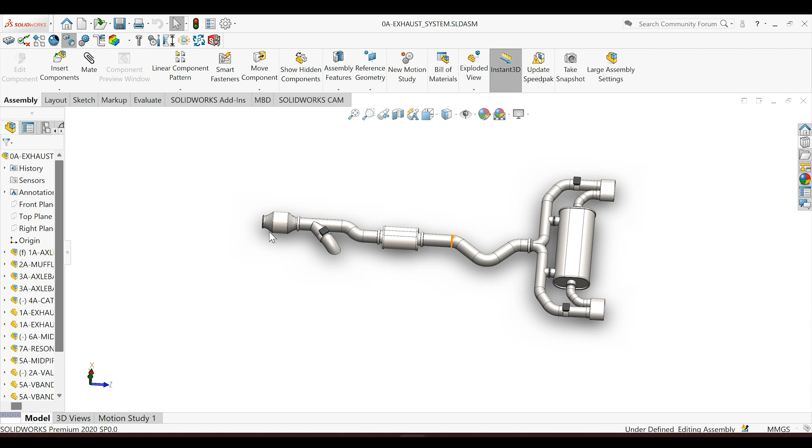So this is pretty much the exhaust system I made for the STI. It may not fit the rear section, the mufflers have to be on the sides, but this is the general layout that I made. So let's start off. This is pretty much starting from the downpipe back, so pretty much a catback, but this includes the catalytic converter. So the catalytic converter we're using is a GESi UHO. This is rated for 1200 horsepower. It's a 6-inch catalytic converter.

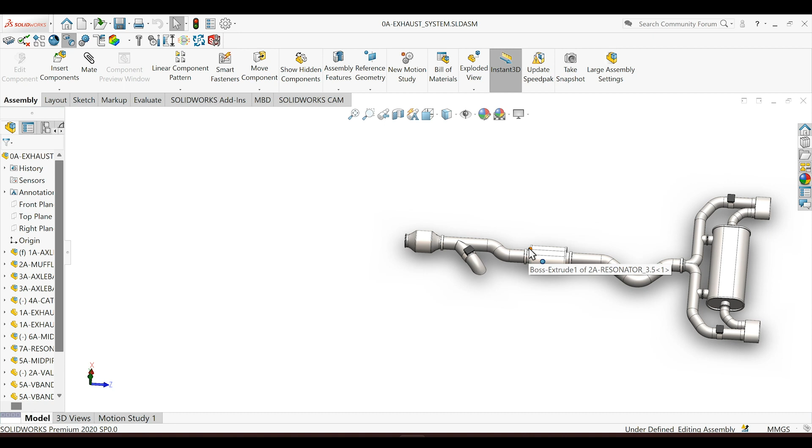These have these converters that taper it down to a 3.5-inch mid pipe. So this section right here is a 3.5-inch. We'll start from the front and then reach the back. So 3.5-inch, all V-banded, and then there's a turndown pipe here. So this one uses an electronic valve. The turndown pipe is just pretty much for sound and for power. So when this valve is on, majority of the gas flow should flow out through this turndown pipe here, and whatever's left will flow through the catback system.

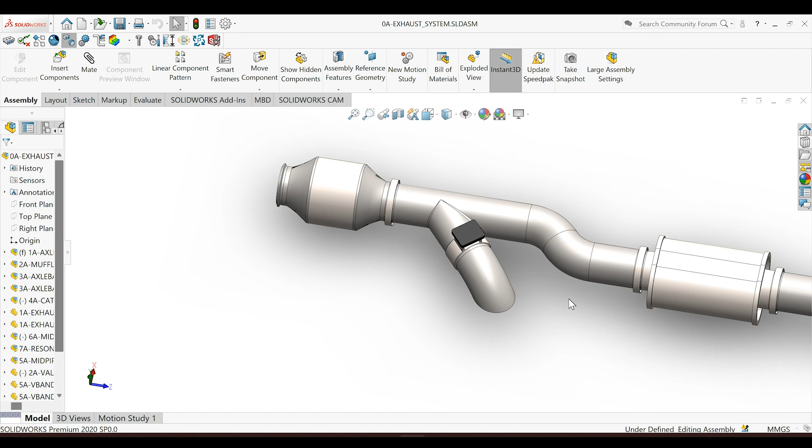This is generally for if you want to track the car. It's just the least amount of restriction possible. So this is a pretty good option to have. It does add extra wiring and another extra set of valves, but it's worth it. Next, here we'll be using a Vibrant ultra quiet sound resonator, of course V-banded. This is a 3.5-inch right here, and then the mid pipe goes all the way down to this V-band right here. It splits into a Y pipe, which splits into dual 3-inch pipes.

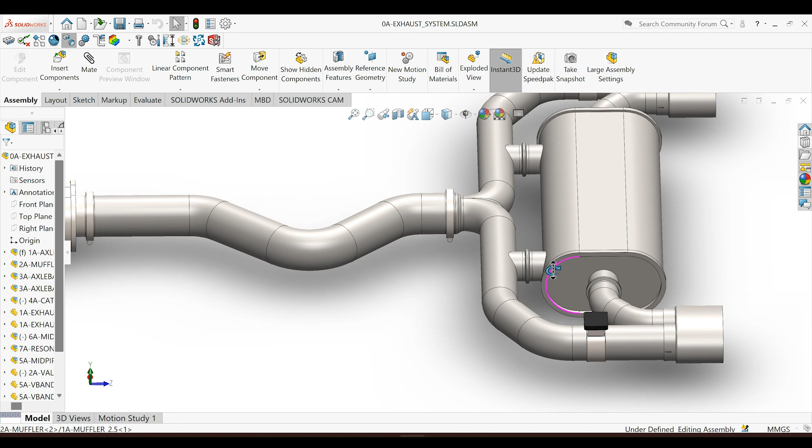So it goes from a 3.5 to two 3-inch pipes. You don't want to do 3.5 again because that would slow down the velocity of the exhaust gases. And that goes straight out to the tailpipes, and these are controlled by the valves here. So when the valves are open, majority of the gas flow again flows out the 3-inch. If it doesn't, the rest will go to this right here, which is a 2.5-inch, and it's also V-banded. I forgot to put a V-band here, but when the valves are closed, it will flow through this muffler here. This muffler is chambered, so it will definitely quieten down, and that will flow out to the exhaust tips.

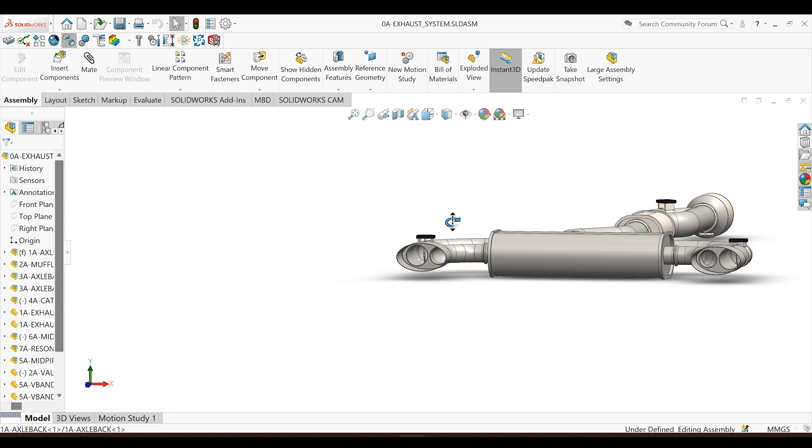And I want to keep the RS style on the STI, so the exhaust tips are the traditional RS oval style, which is pretty sick. You can see the valve right there. But yeah, it's a very neat system. It'll probably flow a bunch of power. And this is just pretty much the first prototype. I haven't done any CFD yet. I will in the future.

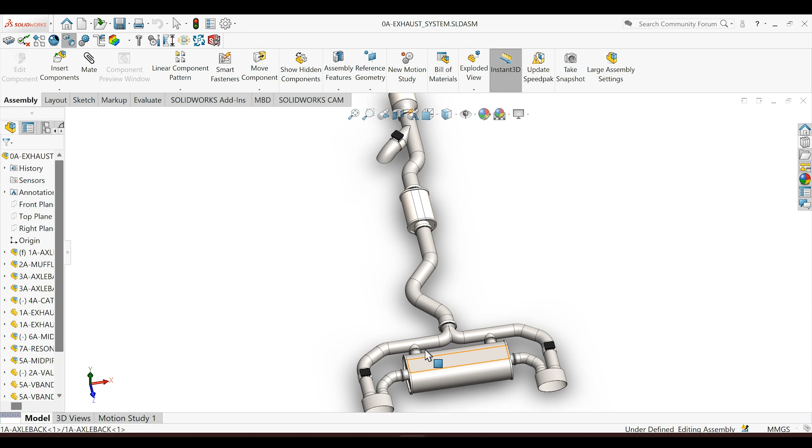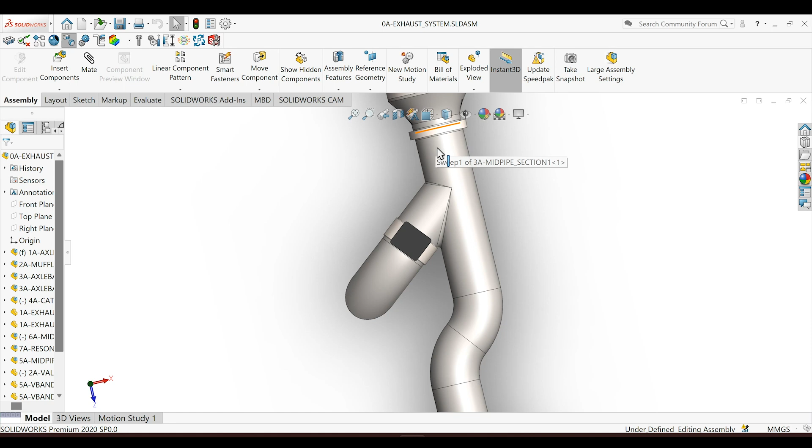I did a little general analysis, and the only issues are that I still need to redesign the chamber of the muffler, it's a bit iffy, and the turndown pipe is at a pretty steep angle. So as of now, the path of least resistance is just going straight. Even if this is open, majority of the exhaust gas will just flow straight instead of curving to the turndown pipe, which I'll give you a look at right there.

But yeah, it's a very cool system. Right now it's made out of 321 stainless steel. It could be made out of 304 to be cheap, or if you want to go titanium, that's another option that Vibrant actually does, because this muffler here is from Vibrant, this resonator is from Vibrant, and the catalytic converter is from GESi, which is EPA compliant, and it allows you to make 1200 horsepower. Like that's fucking crazy.

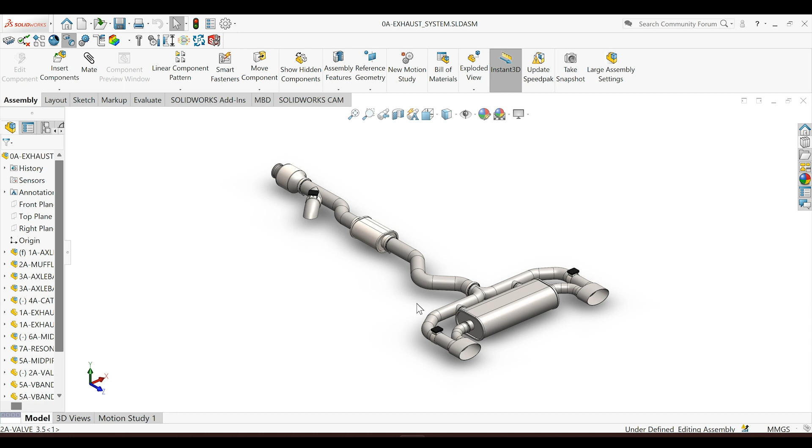Three electronic valves, 1, 2, and 3, and everything is V-banded. Again, this is a 3.5-inch, splits into two 3-inch, and the smaller one that connects to the muffler is a 2.5-inch. And the smaller pipe tones down the sound a lot, and it goes through the muffler, which dramatically decreases the sound. But yeah, let me know what you guys think about the exhaust system.

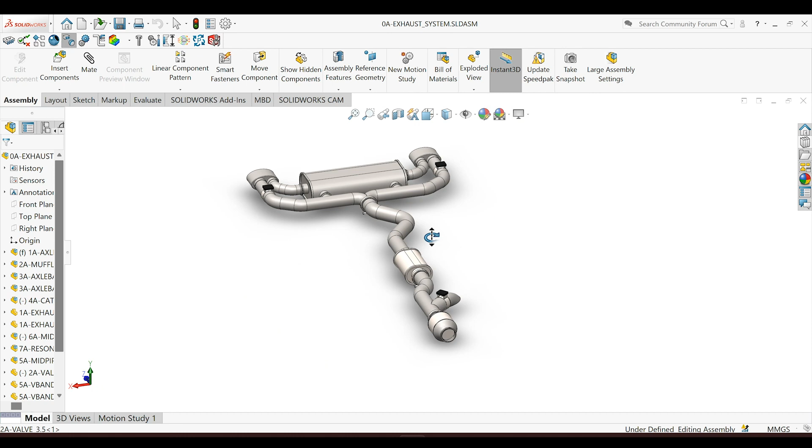Again, it's only the first design. I'm gonna keep improving it, and if I get a 3D scan of the STI, I can make it fit perfectly. I'll add some exhaust hangers and all that stuff.